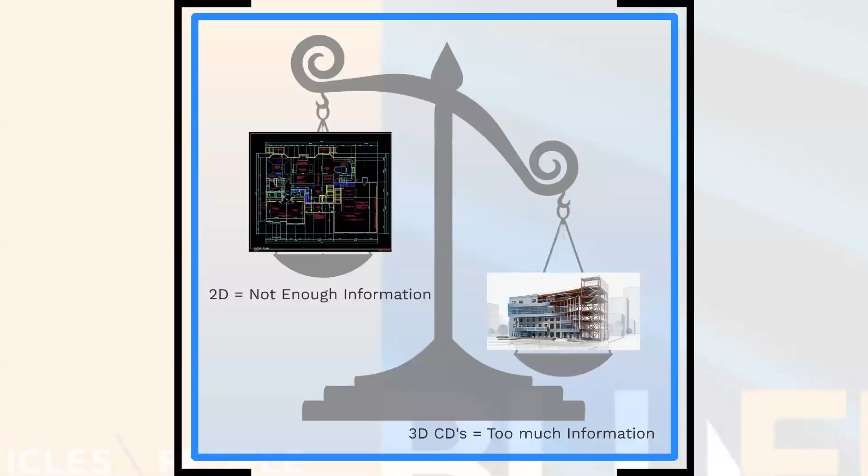That's the part to this equation that the software has to begin to give some feedback on. And currently, really that's just us speaking with you about your project, about your models.

When we start to look, again, in stages of process, you've built your model in the computer at 1-to-1 scale, so it becomes a question of well, what scale do you want it to be? Once you choose a scale, then at that point, it becomes about what is too thin. And I put this in there as - there's no such thing as too thin - kind of as a thing, because it's always a question we're asked: how thin can you go?

It's a very subjective response because I can't say de facto all the time, if you go to this thinness, it'll always work. Because if it's a piece of geometry that's connected to a wall, it's very different than if it's a piece of geometry just floating out there by itself. So generally, once you choose the scale, we scale the model down, and then we begin to figure out what's going to appear in what technology.

So once the scale is chosen, then you start taking measurements. And when you exaggerate some of the details that come up, sometimes people say, well, I think the railing or the banister or the staircase just doesn't look right. But if it can print and you can show it to the client, that's what we're, in the end, looking to do or looking to help with.

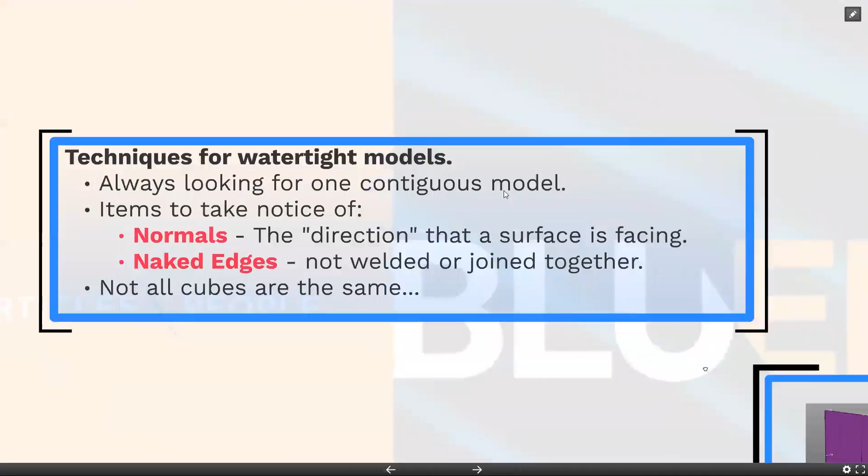As an example, when we look at the normal direction—apologies—we look at the normal direction: this is a thin piece of geometry with no thickness. Because it has a second side, it's important that all of them are facing the same direction.

We'll show this when we actually open up the 3D software, but being able to flip the direction the normals are facing is very important when exporting models for 3D printing. The second thing to always consider is whether your edges are welded together. If they're welded together, that means it's watertight, and that makes it 100% 3D printable.

I'm showing an example here of what they call naked edges, and depending on your 3D software, you do have some tools to be able to fix this geometry.

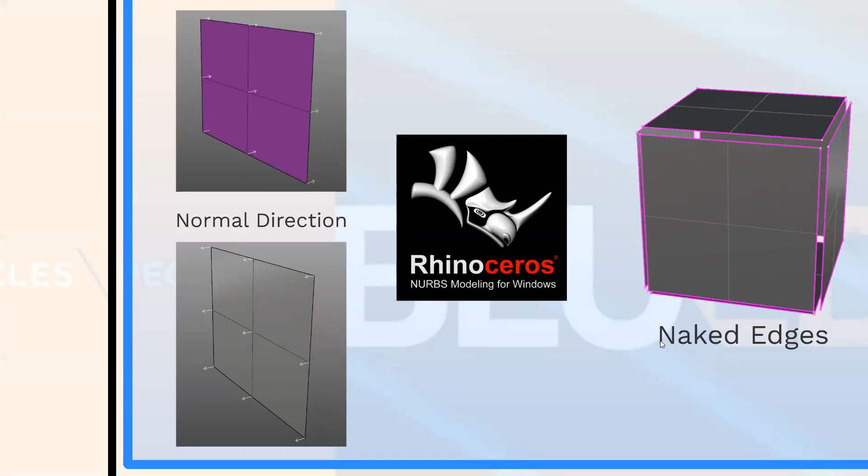This is really the heart and soul of it all: when you're making a 3D model, the model you make for renderings is not the same model you use for construction documents. Conversely, the same model you need for construction documents and rendering is not the same one you need for 3D printing. Eventually, software might get to the point where it can start with one model that works for all three. But until such time, you have to take into consideration which direction you're going to go in at that specific time.

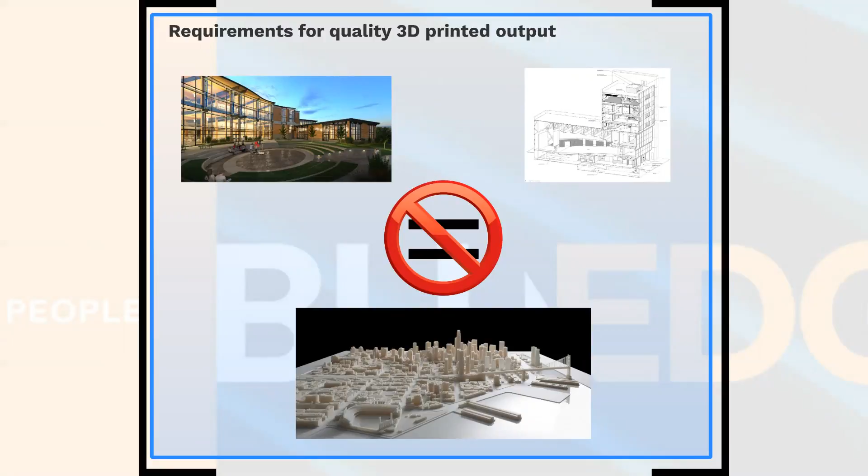So one of the things we recommend is that you can go into SketchUp, into the styles, and change the actual color of the back face. I chose purple, but by all means choose whatever your favorite color is.

Revit. For those of you using Revit in your workflow, you know Revit is a really powerful program. But one of the things it kind of lacks, at least at this point in time, is the ability to really check the file for any bad geometry. That isn't to say, in general, because you're working with solids in Revit, you're pretty much going to have great models to begin with. But it's being able to parse out the layers or families that you don't want to be printing. So that's the other side of it.

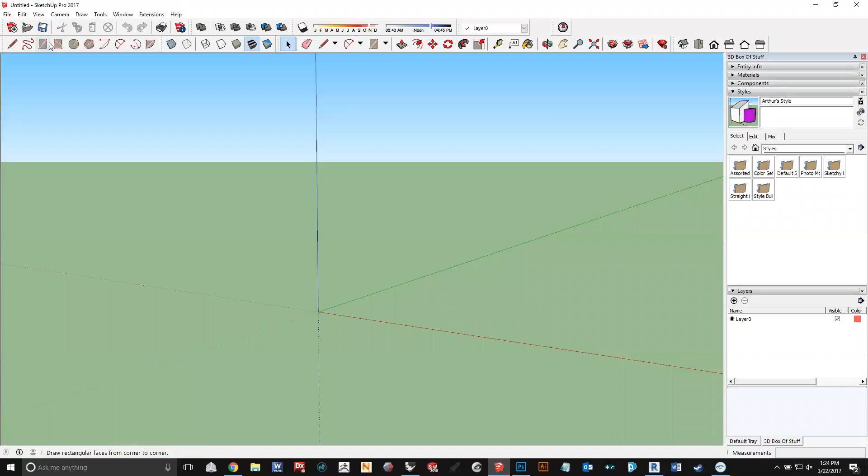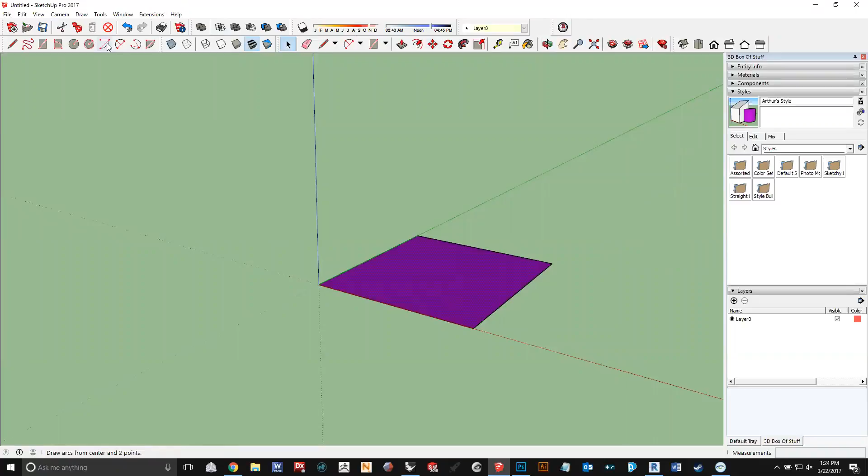So here we are in SketchUp, just reiterating some of the things we talked about during the presentation. You can see how this side of the face is white and the other color, the flip, is purple. If we select that and pull this up, you can see that you can select this face. So if I click on where it says reverse face, you can see how that color really stands out versus the initial gray color. Again, this is where you can change it in the style to a different color.

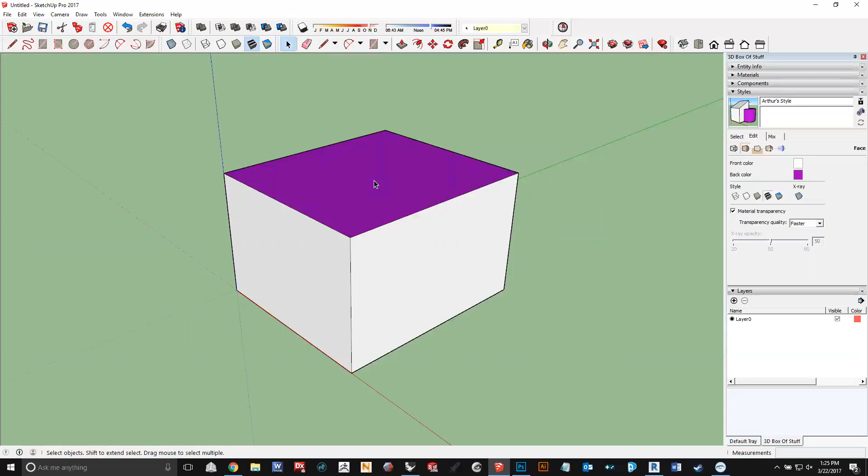The reason this is important is that when you're saving out, say, with STL, you've got to think of your model like a magnet. If you think of it like a magnet, then the shrink wrapping, or the STL, is going to shrink up your model with a bunch of triangles. All of the faces facing outwards are going to attract the triangles. If it's flipped, it's going to repel it, so that face is not going to print. And if that face isn't printing, it's going to print this hollow shell with no wall thickness, and it won't be able to print at all, no matter what machine you have. So in this instance, being able to right-click and say reverse faces helps clean up that model.

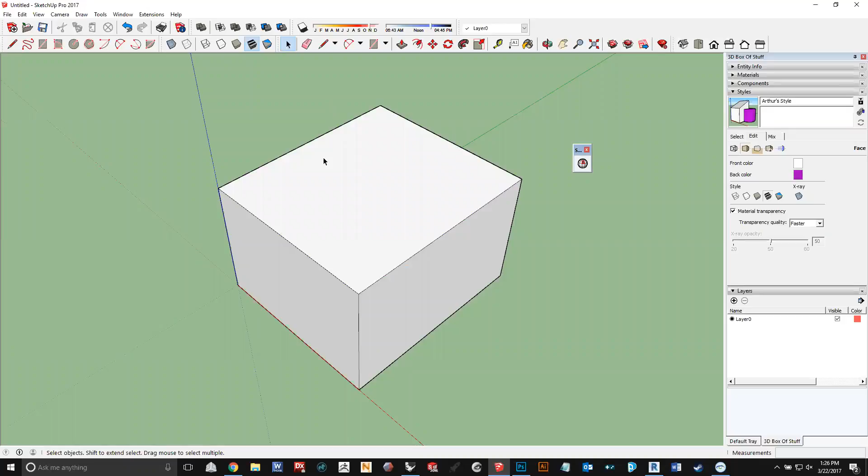The Solid Inspector tool, you'll see this little icon here. You can get this from the SketchUp Extension Warehouse. When you get it from there, you can click on this, and it brings up a little dialog box that says, hey, you have reverse faces. It'll try to fix them and say, everything is nice and shiny, we're good to go.

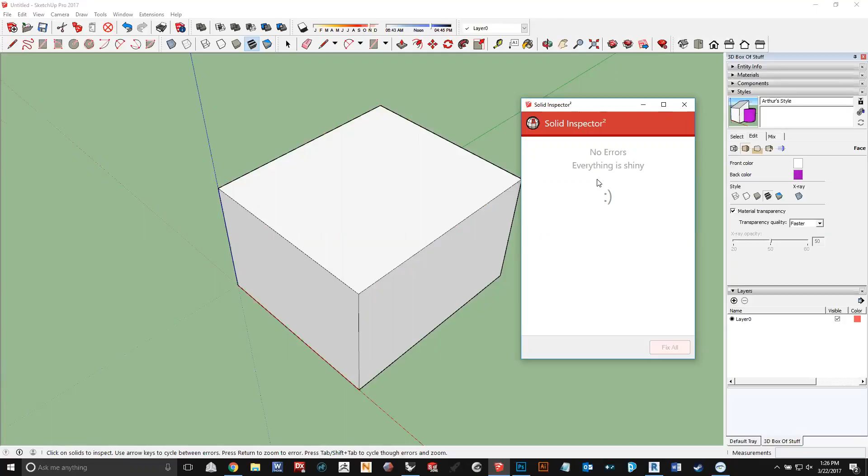Now, I definitely wouldn't call this a magic bullet. It's not going to fix all of the models, especially if you download something from 3D Warehouse and try to just print that. Again, some of the initial rules we talked about before, scale, materials, measurement of details, those are all really important, not just this aspect, but I wanted to show you guys this free plugin for SketchUp.

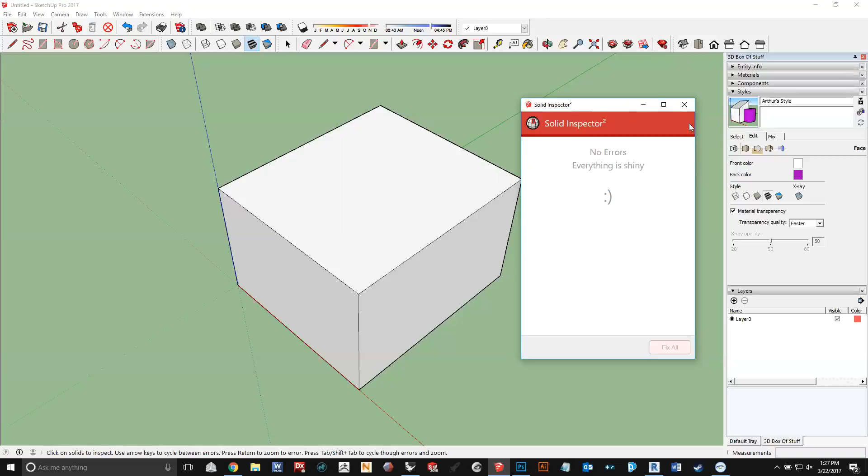Okay, so with the same thought process we talked about before, now I have a bunch of boxes, and you can really see a difference on screen - this box is completely flipped inside out. That would not print, right?

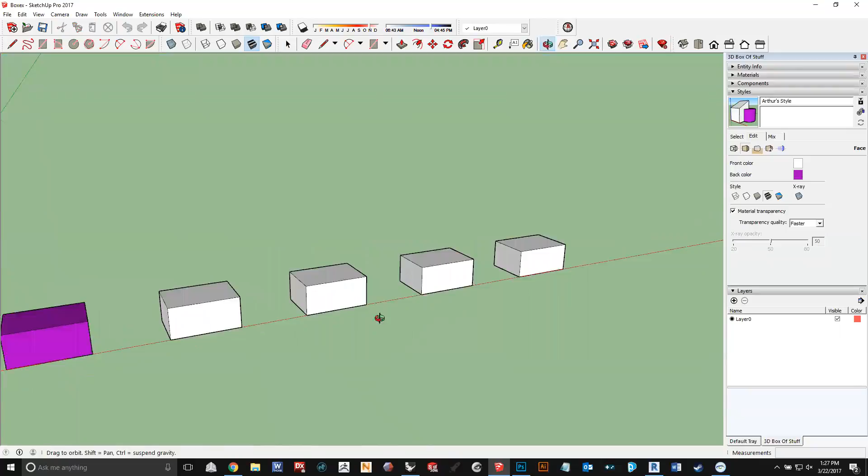If you're working in whatever software, specifically SketchUp, you're talking about being able to group geometry or make components of geometry. That can definitely make a difference in terms of output when you export. So when I select this, it's all one group. And if I select this geometry, you can see this is grouped as two pieces, or it could be considered a component. If you export this as such, they're going to export as a group, linked in the same file, and that may or may not be your intended result.

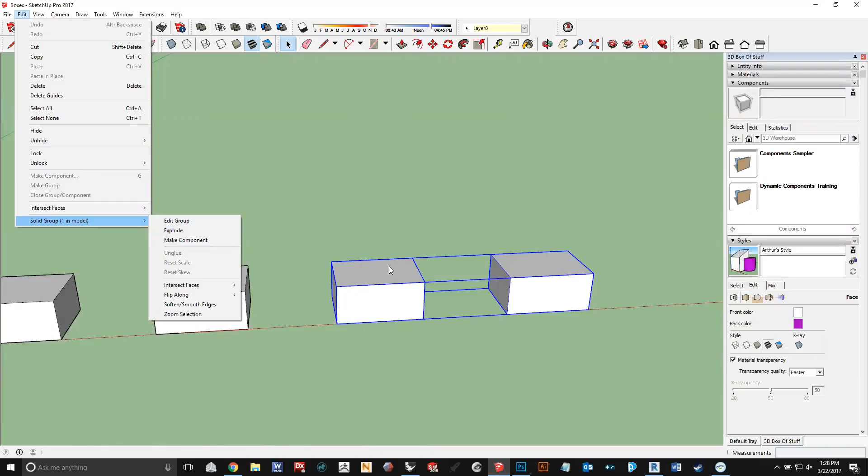So that's something you definitely want to go in and check - you can go into the edit menu and explode it. You should explode it so it can actually see the different components. There are definitely times when you might want to print pieces as one piece, so that's why we might use the option to group.

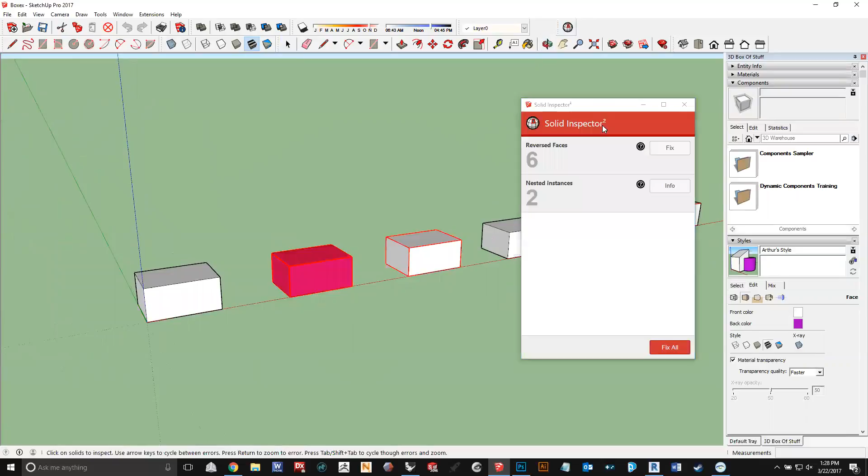But if we use that same tool I showed earlier, the inspection tool, you'll see it brings up a nice dialog box that says, hey, there are two nested instances, there's six reverse faces, so you can fix that. You see it fixes that box that was inside out. All it's giving you right now is not that there's anything wrong with this being nested, it's just giving you kind of a heads up more than anything else.

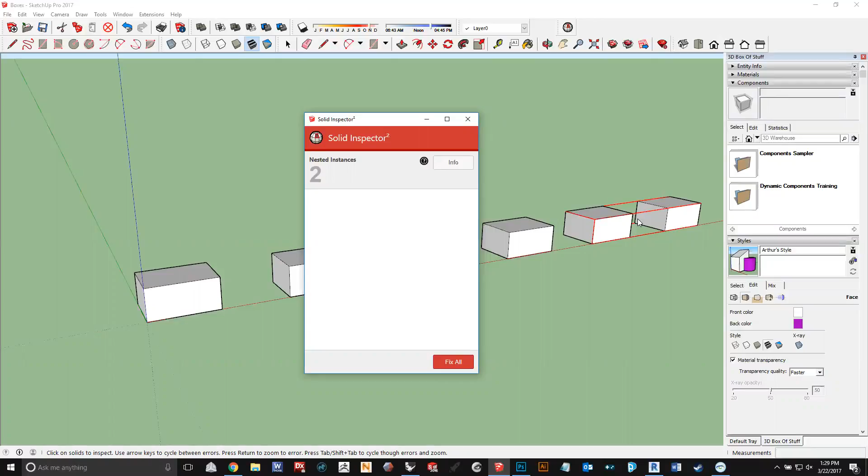In terms of being able to export out models from SketchUp, you definitely need SketchUp Pro to get some of the more advanced, or I would say more universal neutral formats - FBX, IFC, VRML, OBJ. Some of these formats are available, but some are not. You need SketchUp Pro for them.

One thing I will say is this: if you do have SketchUp and Revit at the same time in your workflow, being able to use the IFC file format is definitely what I would recommend if you plan on exporting your model from SketchUp and bringing it into Revit.

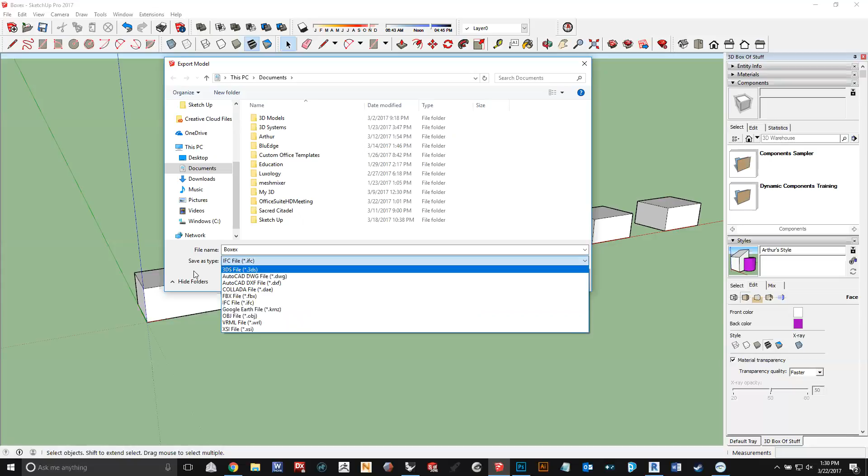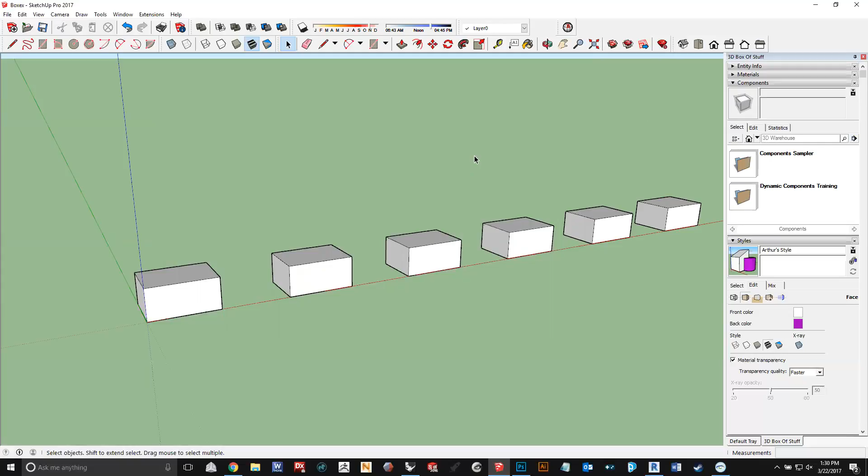Being able to add textures, that's definitely more for the in-depth course, but just know that you can export a model from SketchUp with the textures. Again, if it's a brick, if it's wood, whatever, if it's on the model, that can export and go to the 3D printers directly. We definitely see that a lot more with residential clients rather than commercial, but just know that that is an option.

Okay, so we jump out of SketchUp and let's go into Rhino.

Rhino is definitely great, it works both for Mac and PC, just like SketchUp. In terms of making geometry, it has a plugin that some of you may or may not be familiar with called Grasshopper, which has been very interesting for some of the facades you're seeing, being generative in terms of the nature of how you create geometry.

But for now, we're just going to talk about some of the same settings we showed before, but you can see it here live. Specifically, I'm going into the options for Rhino. Initially, when you install, it's going to say your back faces use the same color as your front, and this is something I absolutely recommend 10,000% changing - you can say single color for all back faces.

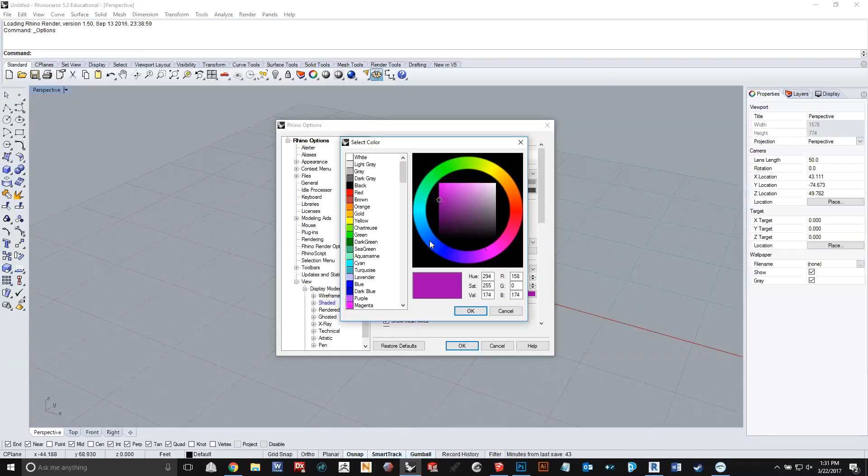And here I'm using that same purple color - I don't know if I'm having a Prince moment, but you can have it be whatever color you choose. What this gives you is direct on-screen notification of what's happening with your model. With that setting change, you find it under View, under Display Mode, under Shaded. This is where you find this option for a single color for all back faces.

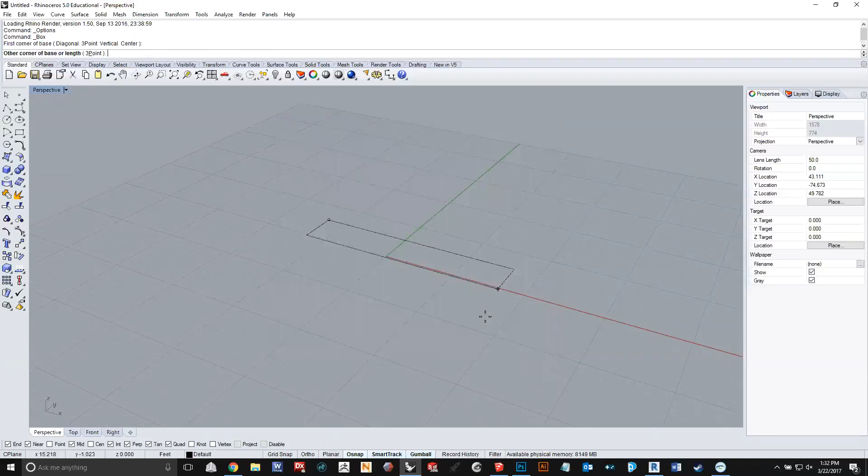So if we go and make a box, and we'll switch our view, we'll switch it into shaded mode.

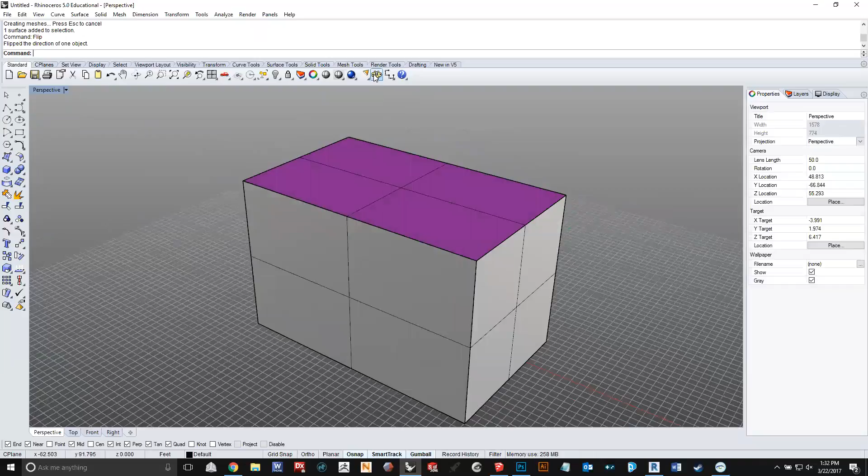If we take the box and explode it apart, in Rhino you can very easily type your commands. You can just type in flip, and you can immediately see there's that same purple face that we saw in the example in SketchUp, right? Again, if your settings are the default...

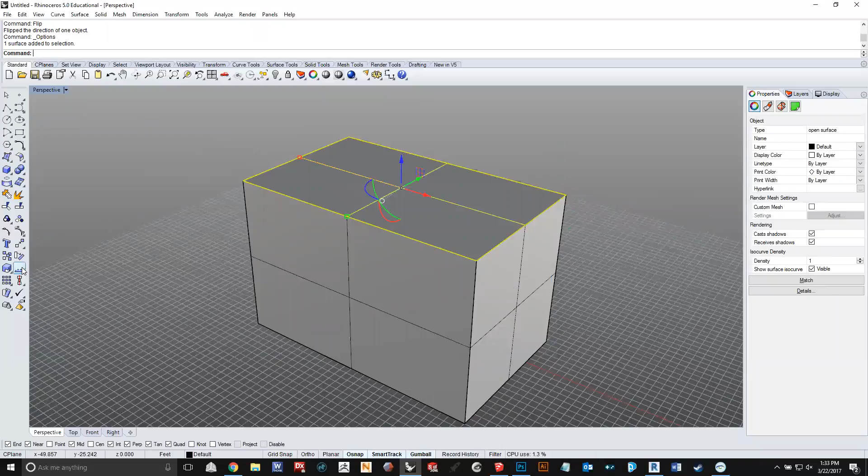You'll see it's the same color, and that's not giving you that same indication, direct on-screen feedback. You can select any poly surface, and there's a tool on the left side that analyzes the direction. If you click on that, you'll see the white arrows showing you what direction that face is going in. So if I do that same command here, you'll see they're facing outwards. In general, you want all your faces always facing the right direction.

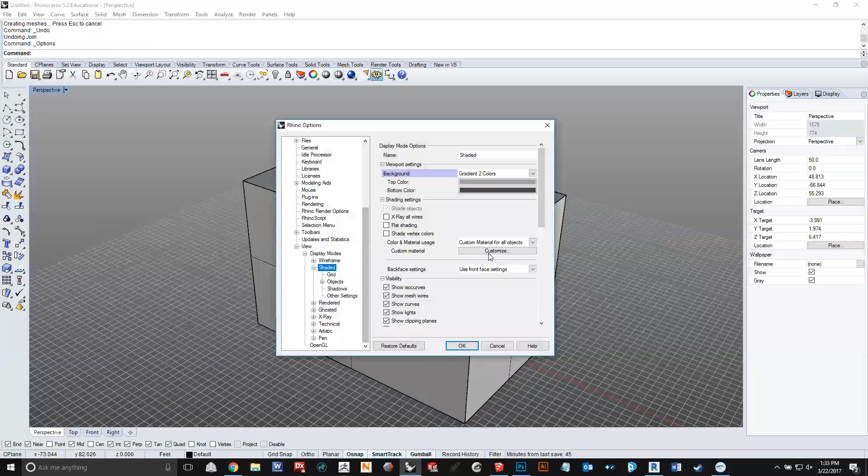One of the nice things about Rhino is that if you select the whole thing and it can make a watertight geometry—if I join that together, actually let me undo for a moment and turn back on the options for the back face. So we pick this whole thing and join it together. You'll notice it automatically flipped that face to the inside. That's a nice feature built right within the Rhino tools to edit and change the geometry.

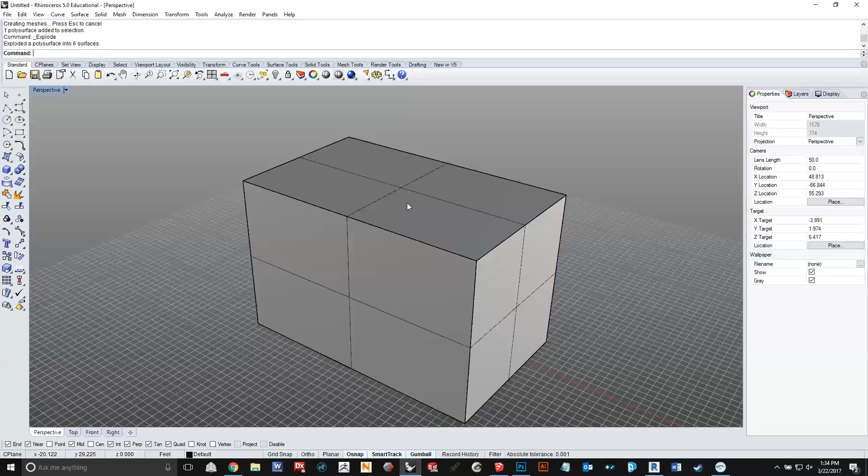So if we explode that, and I hit delete on the keyboard, you get that same empty shell on the inside. The one thing I could say across the board is this: the machine makes what it sees. So if you have a window made of only one surface with no thickness, it's not going to print. And that's just something we definitely understand.

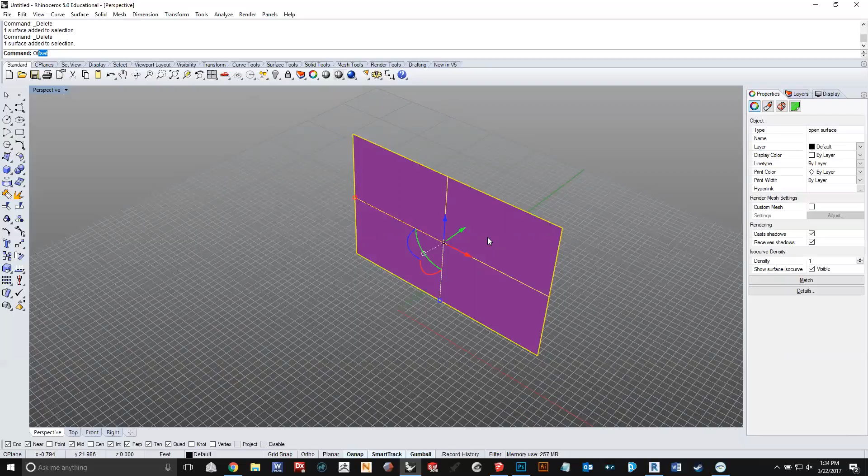It's easier sometimes to represent geometry with just a surface, but at the very least you can type in offset surface, and when you offset the surface, it's giving you a direction of which side it's going to go to. So you can always flip the direction and give it a value, and then this now has some weight—this is watertight geometry that is printable.

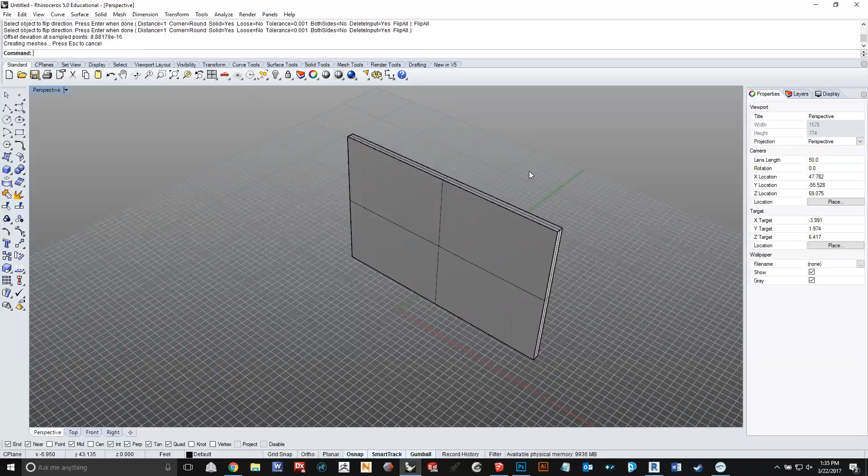Okay, just doing a brief overview, and then we'll check the questions, see if anyone has any. We're going to bring up Revit, just opening a file here. Again, Revit doesn't have any native tools really built inside of it to handle fixing geometry, but because you're working in many cases with solids in Revit, you don't really have to worry as much about flipped normals or naked edges as much as you have to worry about how much information do you want to show.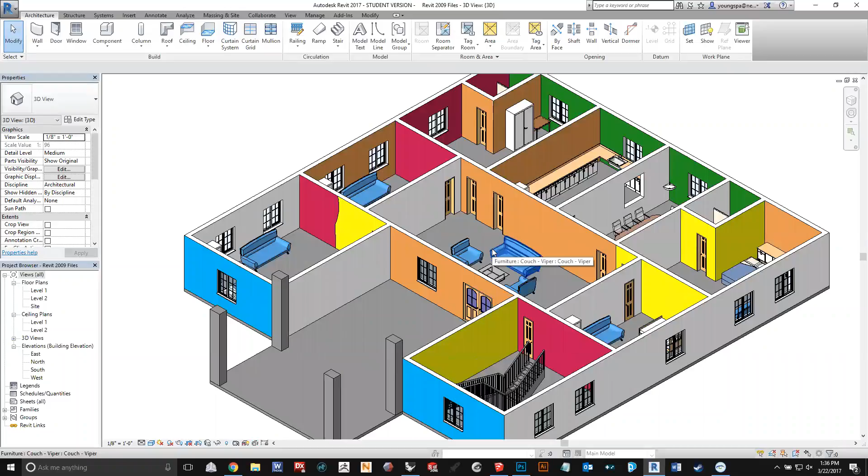Again, a lot of that goes into what scale you're printing at. So the discussion of the legs for this table—on the model, when we print this out, are they going to be too thin when you scale it down to the machine? If so, in many cases we may just do traditional model making at that point. We'll just make the table with balsa wood or chip, or we'll laser. We'll do anything to achieve the result of that model. But sometimes it doesn't make sense to print it out, either because of detail, or there may be support.

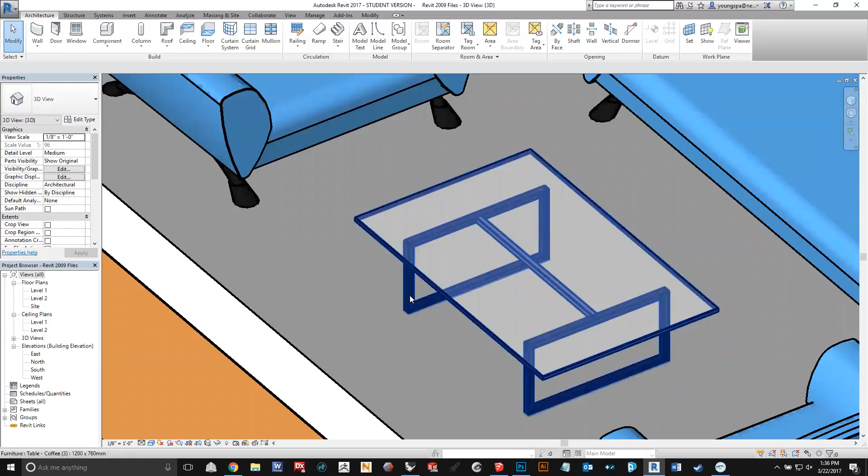There's generally always some type of post-processing that needs to happen once it comes out of the machine. So there may be supports underneath that we may not be able to get to, or might not be able to dissolve away as cleanly. So we may print this separately and then just drop it in afterwards. These are always discussions. In general, when you send the file to us and we're going to print it for you, the production team is always looking at the model, and if there's something that's a little skewed, we will definitely call you and do a go-to meeting, and go from there.

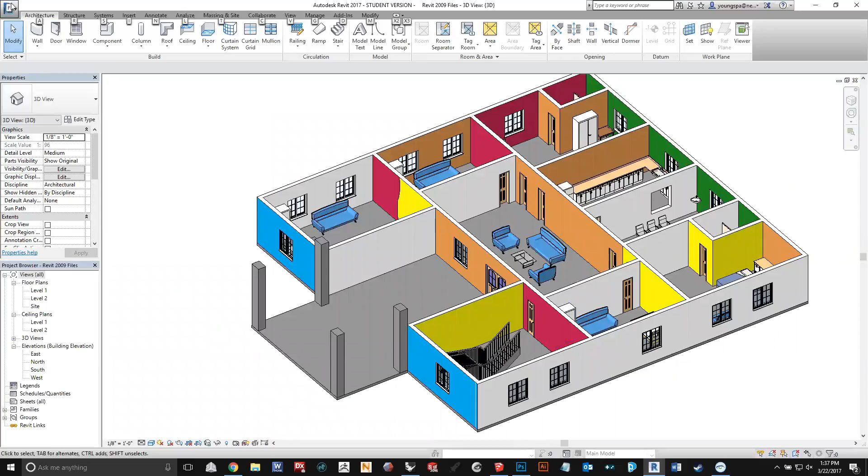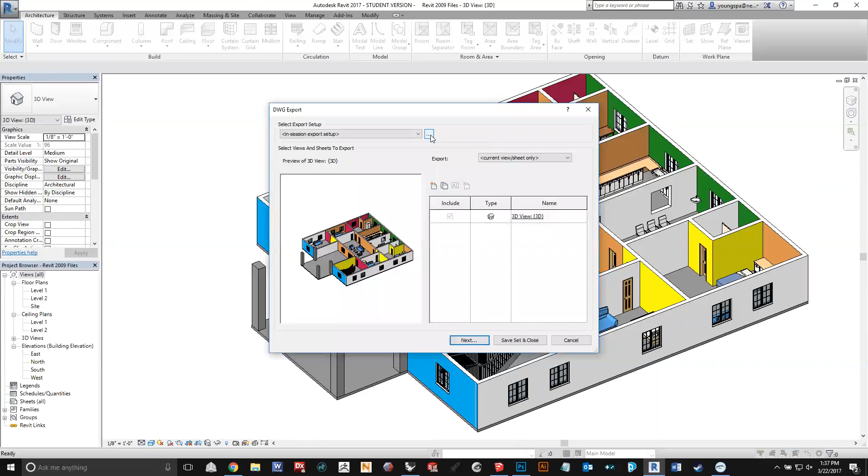Again, just to show very quickly, export this out as a DWG file. This is probably the most important aspect about the DWG format, so that you can keep it as NURBS or just surfaces. You have to click on these three dots, which gives you this option. There's a middle panel that says solids. When you click on that, the default export for the DWG is as a polymesh, which is a little more challenging to work with as mesh geometry. So if we just say as a solid, that will make the model much easier to work with if you want to use it in software like Rhino.

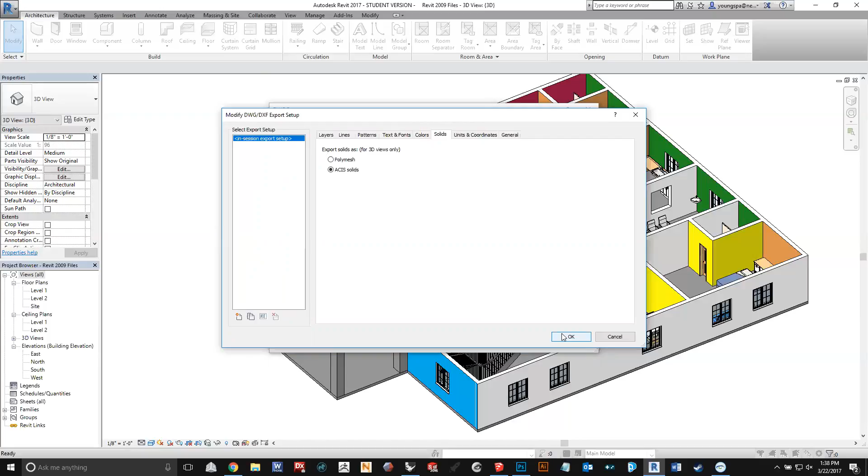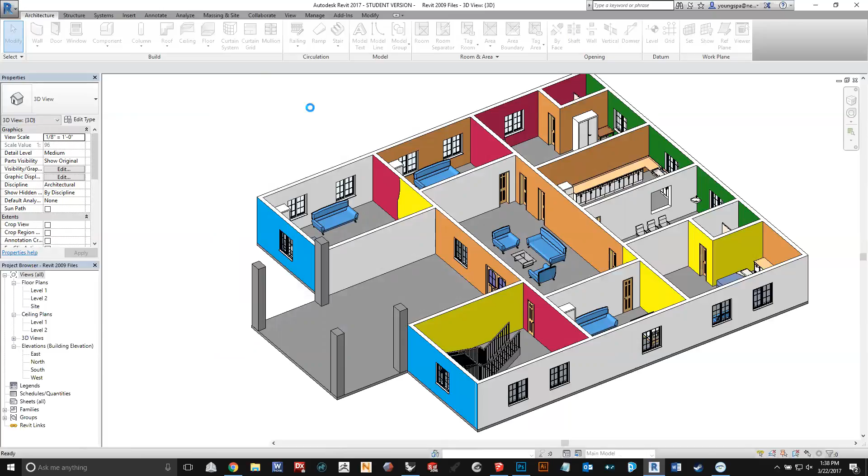So we'll just go ahead and save this model. Again, just want to show you guys the whole process from start to finish of exporting the model and then bringing it into Rhino, and some of the tools that we may use.

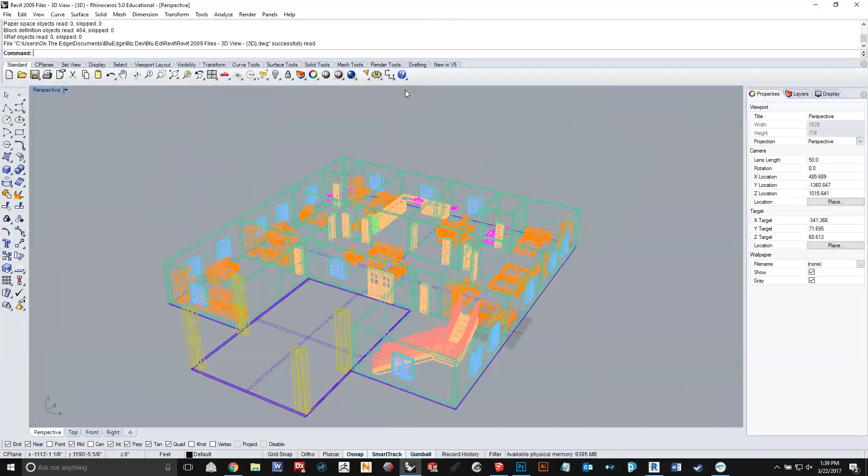So if we go and open this model, what's going to be very important is that you're opening it in the same units that you're working in, whatever software you're working with. But being able to just bring it into Rhino, you can immediately see you're getting one-to-one. If we go into the shaded mode, you'll see that these are actually surface geometries. These are poly surfaces, just in general.

So at this point, one of the easiest things to do that we love is being able to use a bounding box. You pick everything, it puts a box around your whole model. And then we can begin to talk about scale. We can scale it down and go from there.

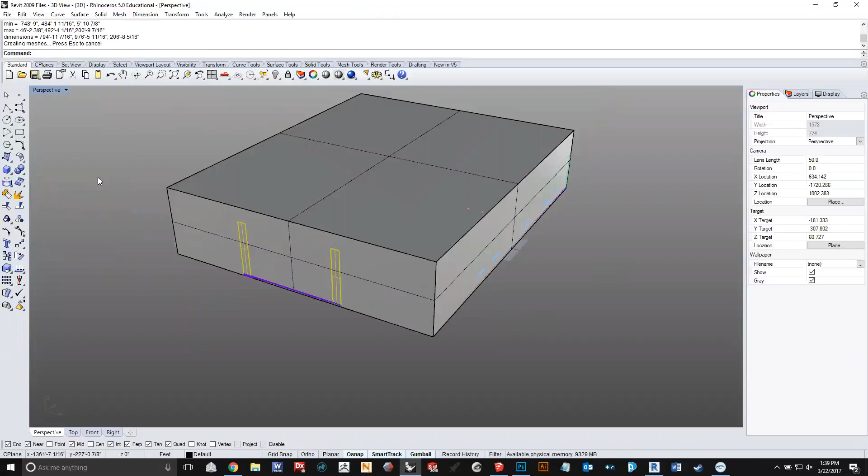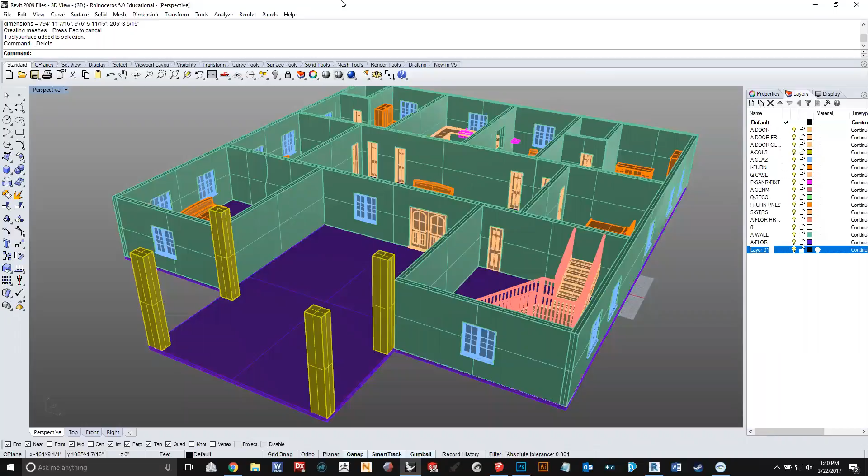Layers, we can then begin to put the doors, the furniture, put things on different layers, because you notice it's carrying across the colors you're seeing in Revit. So if we go to a new layer, we'll call it 3D printing. I'm going to select everything and choose this option to copy objects to layers. So everything selected is copied to this new layer, which we then make active, and we'll hide all of the other layers.

The reason for doing this is, if you remember, one of the things we immediately want to check is whether there are any inverted normals or naked edges. So in this geometry, if we explode this apart, you see there's no purple, unless I specifically type that in the geometry. Generally 90% of the time you're going to get great models coming out of Revit. In Rhino, you can just type in the command called show edges, and we're picking everything, and this edge analysis tool is saying these are initially all edges, and that's not what you're looking for. You're looking for the naked edges, and if you see any purple, then you know that's something you have to begin to address.

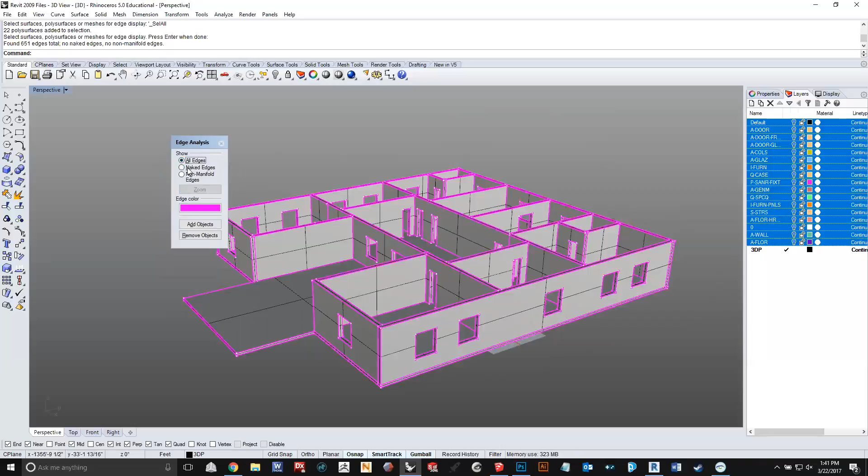So we have a couple of things. We definitely wanted to get to your questions. Let's see if we have any.

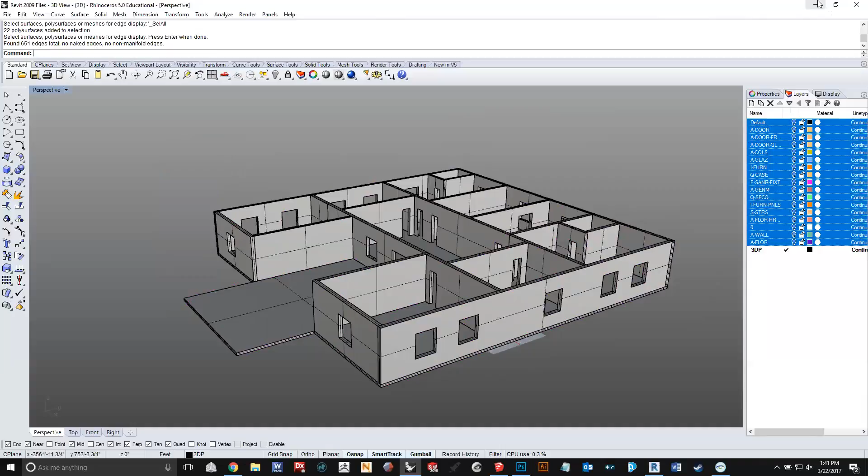It's on your screen. The chat's on your screen. Yeah, I'm looking. Get back to me. And then I waved my finger over like I was filling it in. I wasn't actually.

Hello, so it looks like our chat window was disabled. If anyone wants to ask any questions initially, we can begin to address them. So everyone is unmuted. Does anyone have any questions? I'm not sure if you guys were able to hear before, but if anyone has any questions they'd like to ask specifically about the 3D printing process or file formats, let us know.